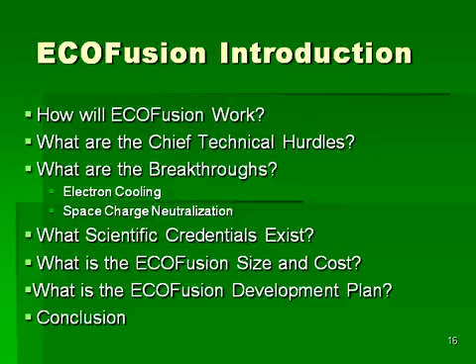This webinar will cover how ECOFusion is designed to work, looking at the chief technical hurdles, as well as the breakthroughs that have been made which will allow this exciting technology to become a reality. A quick look at the scientific credentials will be mentioned, followed by an overview of the ECOFusion size and cost. The ECOFusion development plan will be discussed, and the webinar will wrap up with some concluding remarks.

ECOFusion is a new approach toward achieving fusion that uses colliding beams. The idea is to use the well-known science of particle beam storage rings and apply that science to fusion energy generation. The particle beams will be accelerated to the ideal energy for fusion to occur, and then focused and steered into collision to produce the fusion reactions.

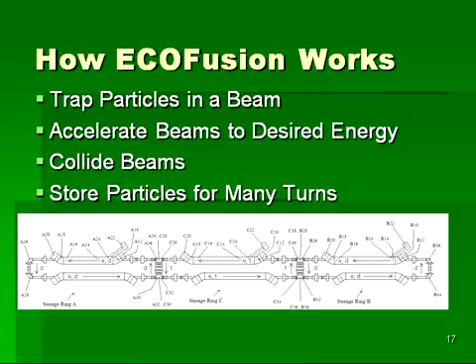The particles that do not fuse or are not lost in rare collisions are recycled around the ring for repeated attempts at fusion, enabling the system to supply the input energy only once. Here we see an animation of the ECOFusion device.

Deuterons, indicated in blue, are sent in from a deuteron ion source into the storage rings on the far ends of this device. The deuterons then cycle around the device, and each time they come around, more deuterons are added, developing a very large current within the ECOFusion system.

In the middle ring, tritons, shown in yellow, are put into their ring. Again, the tritons cycle around the ring with more tritons being added on each pass throughout the device. In this way, both the deuteron and triton currents become very large indeed.

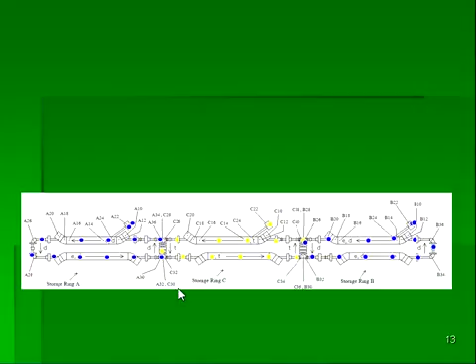In the system, there are overlapping regions where the beams can collide with one another. Focusing elements within those regions focus the beams to very small spot sizes, maximizing the amount of fusion energy that comes out of the device.

It may seem that the ECOFusion idea is rather obvious, and the question naturally arises as to why this hasn't already been done. The answer is that there are typically two technical hurdles that need to be overcome to make ECOFusion a reality. First, the ECOFusion design calls for beam currents of 10,000 amperes, which is extremely high by particle storage ring standards. Forming such beams is extremely difficult, and such beams are usually unstable.

Second, extremely high levels of neutralization must be achieved in order for ECOFusion to operate, with the electron system requiring a neutralization of 99.9999%. For these reasons, colliding beam fusion approaches have generally been abandoned at a very early stage. The advances of ECOFusion entail delving deeper into each of these issues in order to provide the needed solutions.

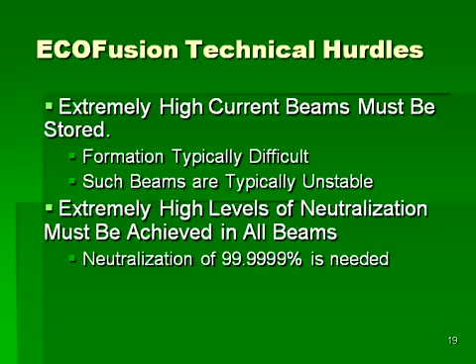For each of the two main technical hurdles, the ECOFusion design has proposed a breakthrough technological solution. First, to achieve the needed high currents of deuterium and tritium nuclei, high current electron cooling is proposed. It is well known that electron cooling will allow for stacking of beams. This is the process of continually adding new beam on top of a stored beam. This will allow large currents to be built up gradually.

It is also well known that electron cooling will prevent beam instabilities by controlling particle trajectories on each turn. The technology of electron cooling for ECOFusion presently has one patent pending, and two are about to be submitted.

A second breakthrough is in the area of high levels of neutralization. Here, an esoteric technology demonstrated in electron cooling collectors has been extended to enable high levels of neutralization throughout an entire beam. A three-dimensional ion trap is formed to trap neutralizing ions. For this breakthrough technology, a patent has already been issued. The next few slides will briefly introduce each of these breakthrough technologies.

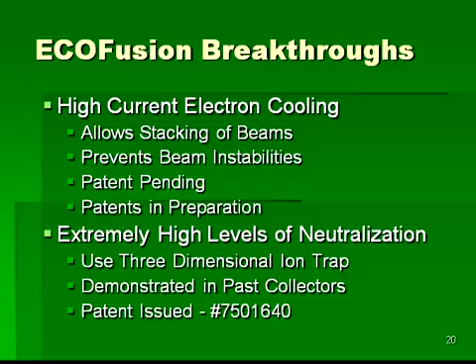Here we see the underlying mechanism of the electron cooling process, which is the first ECOFusion breakthrough. In 1956, Spitzer recognized that ions slow down in a free plasma of electrons. Basically, the positively charged ion attracts the electrons due to their opposite charge. The energy gained by the electrons is lost by the ion until it has the same energy as the electrons.

10 years after Spitzer's work, Budker realized that an electron beam is simply a moving, free plasma of electrons. He realized that if an electron beam was formed at the ideal velocity wanted for the ions, that the ions would obtain their ideal velocity.

An ECOFusion breakthrough is the realization that the electron beam will damp away any random kicks that the ions get as they go around the ring. Since it is these random kicks that lead to instabilities, high current electron cooling can cure beam instabilities.

Secondly, ions injected with a small angle will have that angle eliminated by the electrons, and this is what allows high currents to be obtained in ECOFusion. We can keep adding small current on top of a large stored current to get the high currents desired.

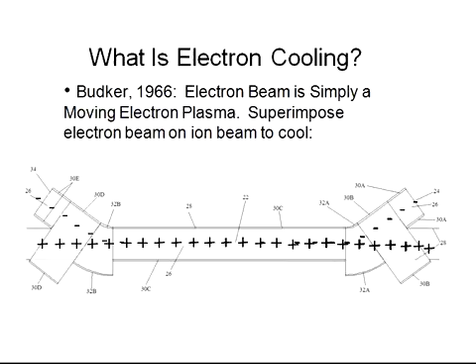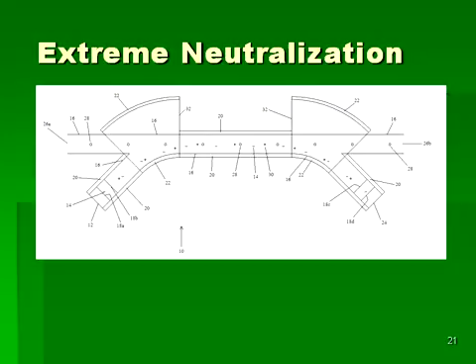The second breakthrough that will allow ECOFusion to operate comes in the area of extremely high neutralization of particle beams. Here we see a diagram from the utility patent granted on the invention. In a normal electron beam, the electron beam is formed by heating a metal that frees electrons from the metal surface. These electrons are then accelerated to form the beam.

The breakthrough was a realization that a final deceleration of the electrons would provide an electric field that would force any ions back into the central beam region. By decelerating the electrons at the end of the device, an electric field would exist that forced the ions back to the central region from that end as well. This would then cause the ions to travel back and forth between the ends of the system, neutralizing the electron beam space charge.

However, the ions could conceivably escape sideways. In order to prevent the ions from escaping on the sides of the device, magnetic fields are formed using wires in solenoids and toroids that keep the ions trapped transversely to their motion. Therefore, the ions are trapped in all three dimensions.

The overall system should achieve the desired levels of neutralization, since it is known from tokamaks that plasmas can achieve very high levels of neutralization. Tokamaks require millions of amperes, while the ECOFusion will require only 10,000 amperes to operate.

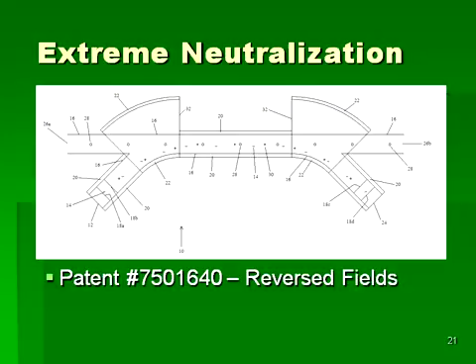At this point in the ECOFusion overview, it is relevant to look at some underlying credentials. I am Dr. Delbert Larson, and I am the originator of ECOFusion. I earned a PhD in accelerator physics from the University of Wisconsin back in 1986. My thesis project involved the design and construction of a 2.5 million volt electrostatic accelerator that was intended for the electron cooling of antiprotons at Fermi National Laboratory.

I then held several positions in various universities and national labs, which led to my appointment as the lead accelerator physicist on Fermilab's positron emission tomography accelerator in the mid-1990s. During all of my career, I continued to develop computational tools to design accelerator systems, and in every case where the designs were actually built, the devices worked in excellent agreement with their designs. This success surprised many in the field, since in each case the design techniques were quite different than what was typically done.

Throughout the time I was designing accelerators, I would occasionally look at using accelerators as a possible solution to the problem of fusion energy production. And a few years after the end of the PET project, I had come up with an idea called ECOFusion. I then devoted 6 years to ECOFusion until I finally arrived at a design that I believe will work.

ECOFusion has been presented many times to scientific audiences, with the first presentation being given at a 2007 International Fusion Conference held in Washington, D.C. After that, ECOFusion has been presented to scientists in small and large groups, including colloquia at Fermilab and the University of Texas at Arlington. 2 patents have been issued for technologies that underlie ECOFusion.

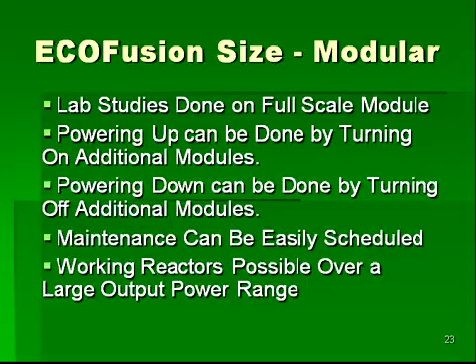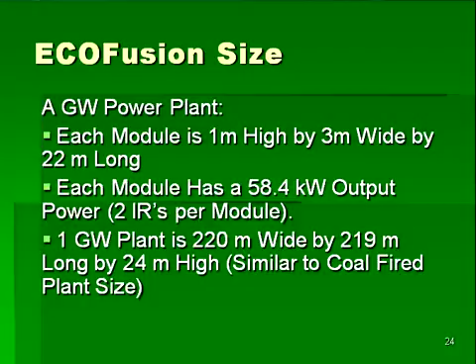As an exercise, it is interesting to calculate the size of a gigawatt power plant using ECOFusion. Each ECOFusion module is 1 meter high by 3 meters wide by 22 meters long, and each module has an output power of about 60 kilowatts in the present fully studied design. This would leave a 1 gigawatt power plant with a size similar to that of present coal-fired power plants.

It might at first seem that ECOFusion will be prohibitively costly. After all, we are proposing using thousands of particle accelerators to build a gigawatt power plant, and the first prototype is predicted to cost around $15 million. However, it is important to realize that the $15 million is mostly salaries for scientists and engineers, and that the first one will be a one-off custom development. Eventually, the design will be consistent, and each module identical to the next, which will enable mass production of the units. And in mass production, costs are typically driven by materials costs.

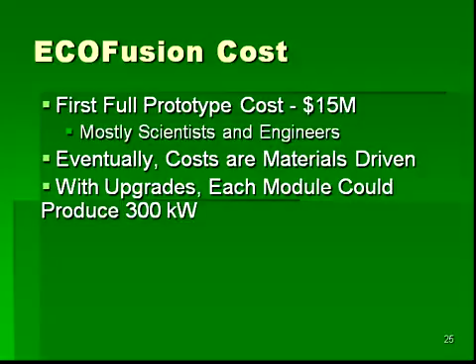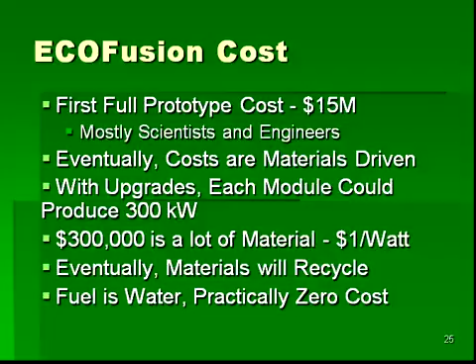With design upgrades, it is already foreseen that each ECOFusion module could produce 300 kilowatts of output power. $300,000 can buy a lot of materials, which would enable ECOFusion units to be built for $1 a watt, which would be very cost competitive. And while ECOFusion will use permanent magnet materials which can be expensive, eventually the ECOFusion units will be recycled, lowering the costs still further. Lastly, since the fuel for ECOFusion can be found in water, there is practically a zero fuel cost. Therefore, in the long term, ECOFusion promises to be an extremely cheap source of power in addition to its other many advantages.

The ECOFusion development plan has 4 main milestones going forward. First, we plan to demonstrate high current, low voltage electron beam operation in order to show that high levels of space charge neutralization can be achieved on a benchtop scale. This initial demonstration is achievable for about $50,000, and proposals have been submitted to pursue this work.

Once the benchtop device has proven operational, we plan on working on a full-scale electron cooler, which is estimated to cost around $500,000. The final step in the experimental program is a full working prototype, which we expect to cost about $15 million to construct. Once the prototype is proven to work, ECOFusion will be ready for commercialization of the technology. Should this program be fully funded, it is expected that we should reach the commercialization point in less than 5 years.

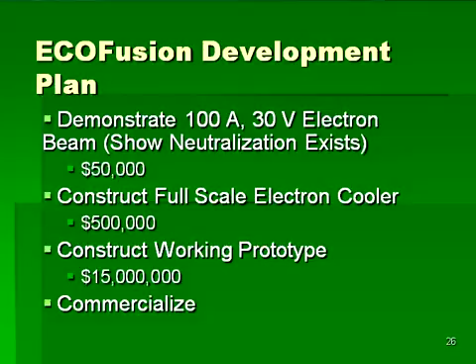You have just seen how ECOFusion has great promise for the world. ECOFusion uses an inexpensive and inexhaustible fuel source, it produces no greenhouse gas emissions, and there is no direct production of nuclear waste. ECOFusion does not use nor produce weapons-grade fissile materials. ECOFusion is cost competitive in the long term, and a fully funded effort should result in fusion energy being available within 5 years.